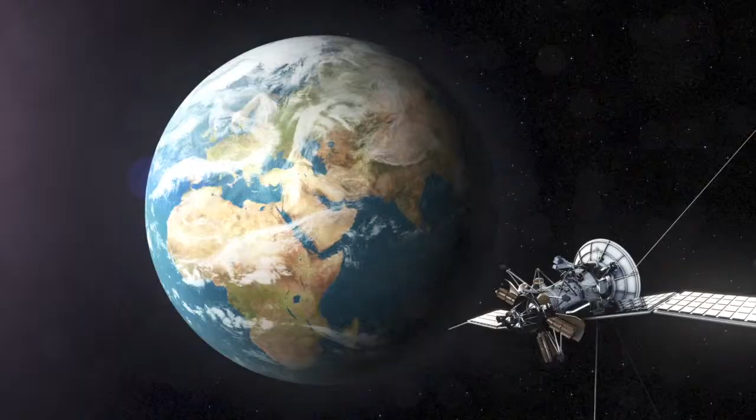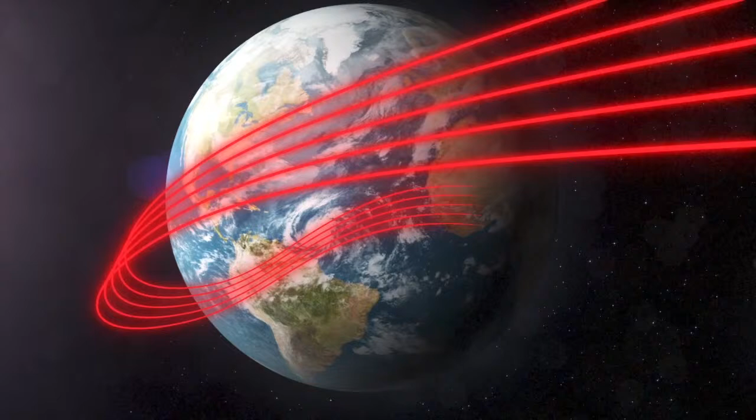Our globe is turning, steady. Electronics are part of our world, everywhere around us, always. Our world is spinning, fast. Technology is part of our lives. We make it work everywhere, right here, right now.

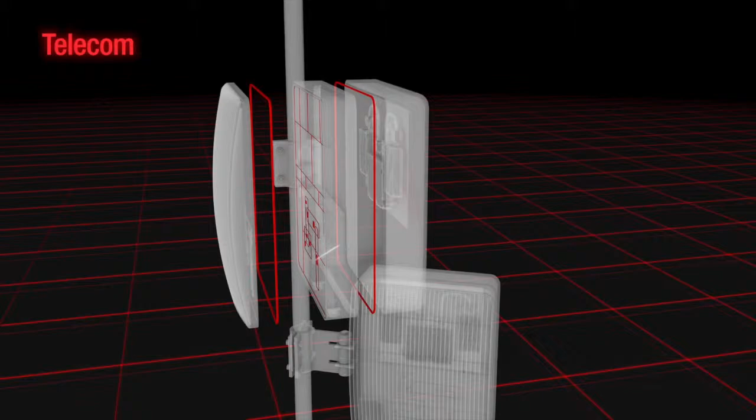The right solution can be the difference between success and failure. Functional EMC and thermal management solutions require knowledge, innovative design, and secured quality. A partner to trust. In order to challenge expertise, reliability and effectiveness are necessary. We know how and why.

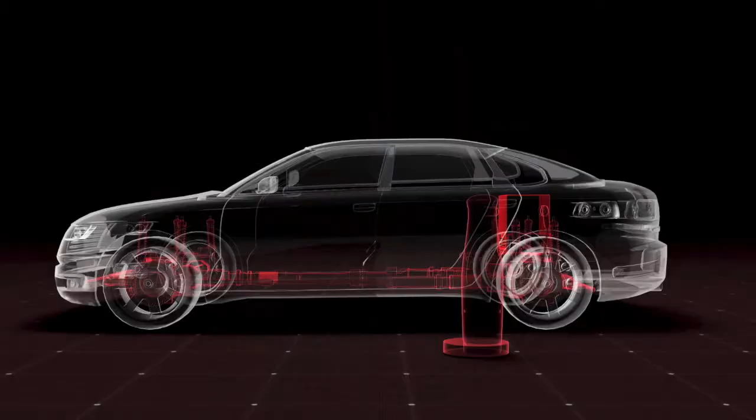Nolato offers you the optimal solution, whatever product, whatever industry. We know what and when. We provide you advanced development in order to keep you one step ahead on the market.

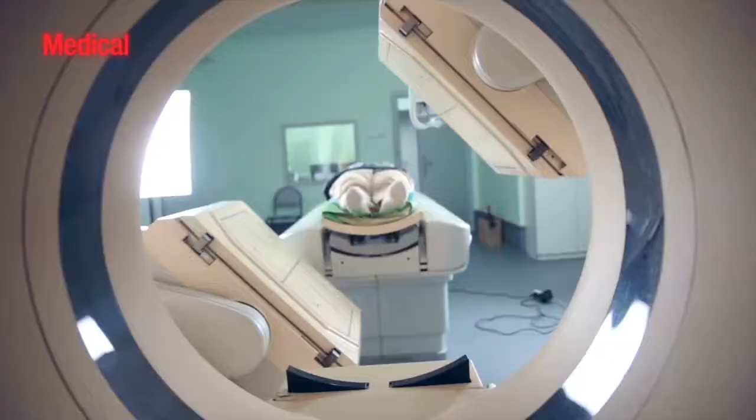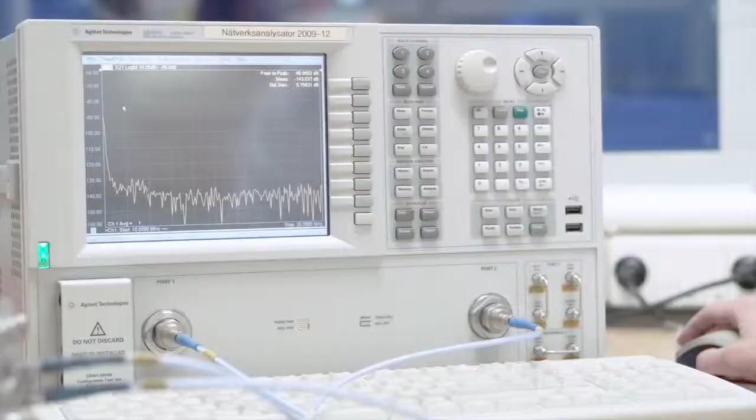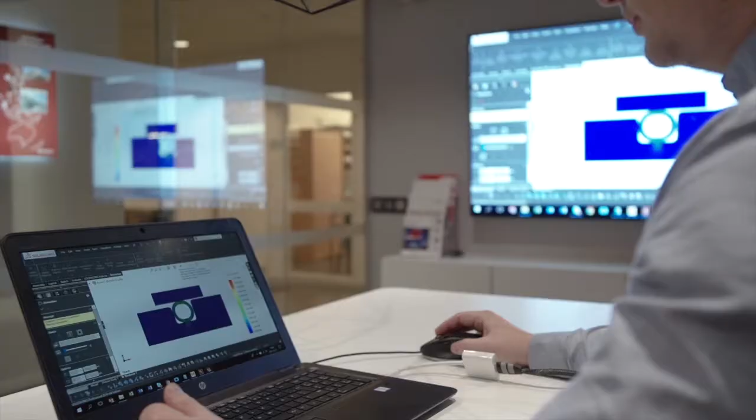With high quality and unique material, our expertise is yours, when you need it, where you need it. Nolato gives you innovation, efficiency and future. Customized or standard, wherever you are, whatever you do, we are there for you all the way, always near. So let us show you how we change the world and your business. Sustainable, unique and professional, today and tomorrow. The future is here. We are your world partner in EMC and thermal management.

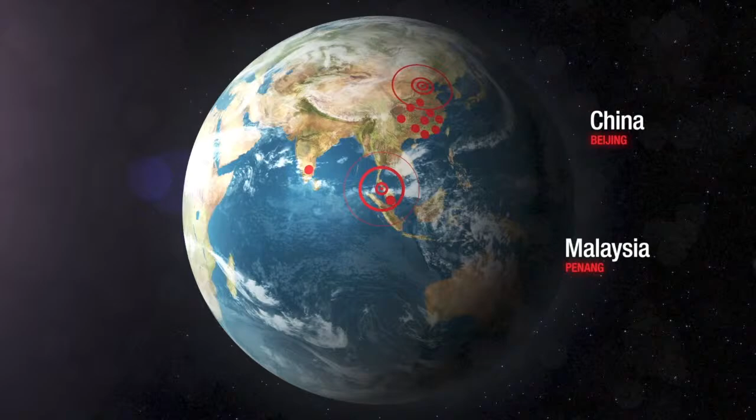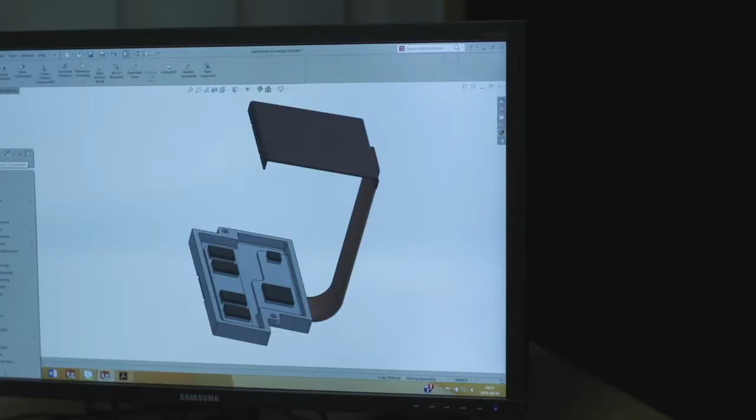Far beyond only recommending which type of interface material to use, we have the expertise to guide you in your whole thermal design process. Our expertise also covers the other technologies for electronics thermal management on the market and how these can be applied to best effect. The thermal design influences many other hardware and even software disciplines in application design, all of which we have familiarity with.

Our organization possesses an extensive experience of designing thermal solutions for all subsets of the electronics industry, from advanced high-tech to extreme high-volume consumer products. Our capable R&D organization is constantly advancing our position in electronics thermal management. They can also develop new custom materials to customer requirements.

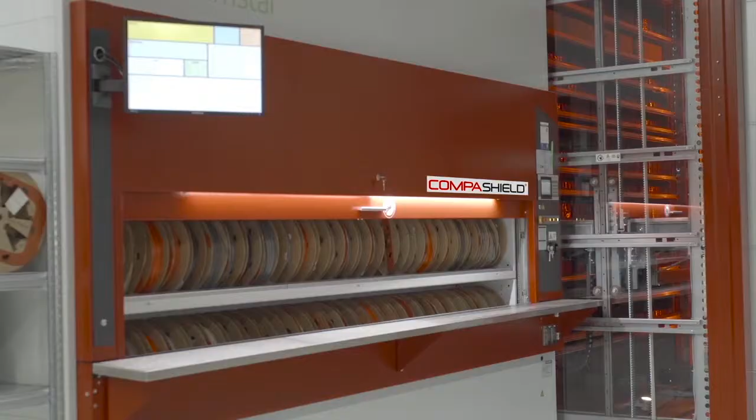CompaShield extruded gaskets are made of electrically conductive silicone rubber, designed to fit the specific application perfectly. The gaskets are available in any profile and cross-section needed by the customer. Our extruded solutions are cost-efficient and reliable. No wonder CompaShield extrusion has become widely used in all kinds of application areas.

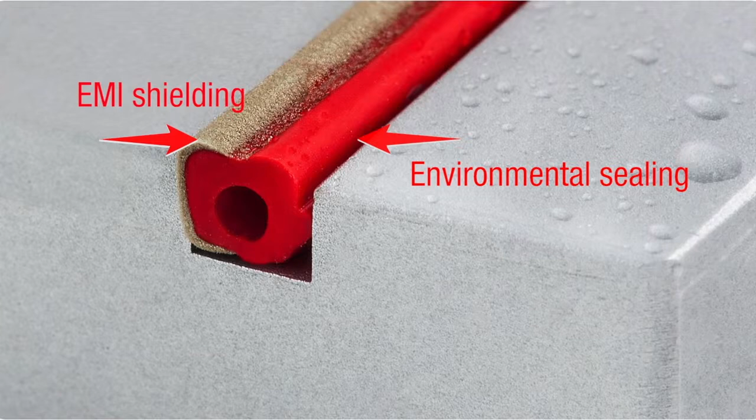Besides the wide range of standard products, we also offer advanced solutions as the CompaShield EE gasket. An efficient solution that combines optimal EMI shielding and safe environmental sealing in one single gasket. Add the press fit feature to the EE gasket and you'll get assembly that is easier than ever. It also improves the shielding effectiveness and eliminates the adhesive costs.

With the anti-stretch feature, the gasket has an embedded metal thread reinforcement. This design prevents stretching and shrinking to enable an easier and more secured assembly, just the way you want it.

Another popular gasket is CompaShield Soft, co-extruded with conductive material as the outer layer and non-conductive as the inner. When soft becomes ultra-soft, with an even thinner conductive outside layer and a unique ultra-soft core, the gasket maintains its excellent shielding properties, but is also prevented from collapsing in sharp corners. CompaShield Ultra-Soft is ideal for connector applications.

Did you know that you can order free samples from our interactive gasket guide online? Quick and easy, and a great way to find your perfect match.

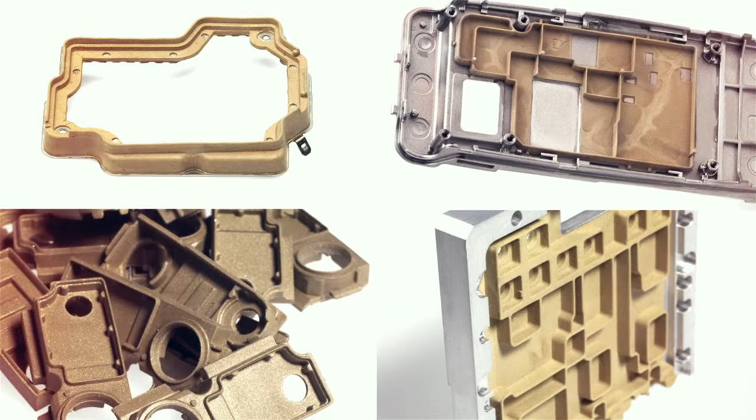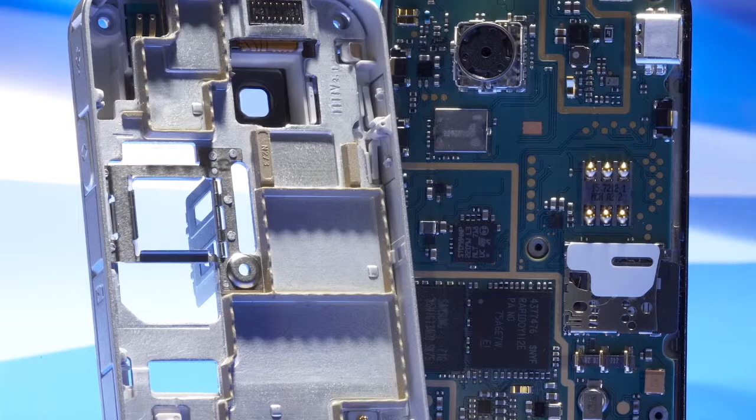CompaShield molding involves overmolding with electrically conductive silicone rubber on various substrate surfaces, for example cans and frames, or just as press-molded components. Our custom molded solutions with high-quality materials and efficient manufacturing methods are used for diverse applications in broad industrial segments. Besides excellent shielding, CompaShield molding provides great flexibility in design and gaskets with high-precision 3D geometry.

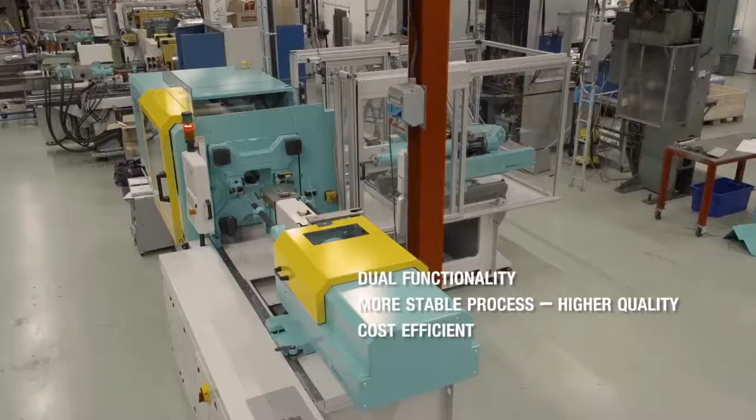Co-molding is an efficient alternative where both the conductive and the non-conductive silicone rubber are molded at the same time. This simplified process, with one step instead of the ordinary two, provides benefits such as cost efficiency and stability.

The CompoShield molding family also includes CompoShield sheets. The sheets are available in a range of conductive fillers and ready to order in standard size or as die-cut or kiss-cut parts, perfect for connector and waveguide gasket applications.

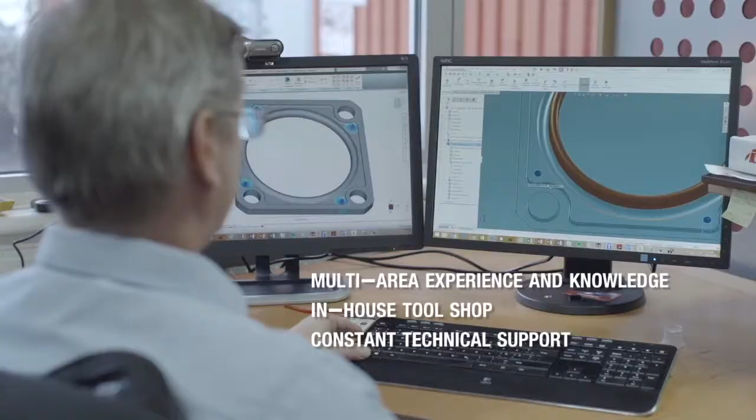Thanks to our experienced field application engineers, capable in both EMC and the mechanical area, you'll have constant support and guidance through the whole process, from conceptual phase to production startup.

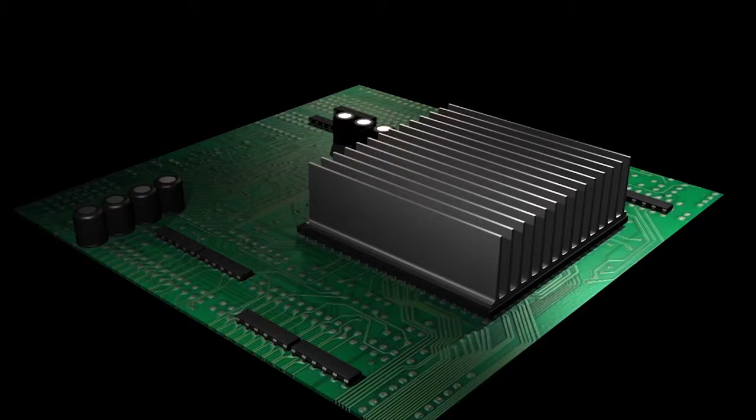Now, the crucial question is, where does this heat go? Heat dissipated at the rate it's generated won't accumulate as raised temperature and isn't a problem. However, with thermal barriers in the design, the temperature at the heat source will keep rising until the thermal gradient is steep enough for the heat to escape, which can cause problems, and this is where our expertise can help.

Understanding how to solve, or even better prevent, thermal issues in a design is never a question of one single component, of one single link in the thermal chain. It is a question of understanding the mechanisms of heat transfer, of following the heat all the way from the heat source to the final sink and removing the bottlenecks.

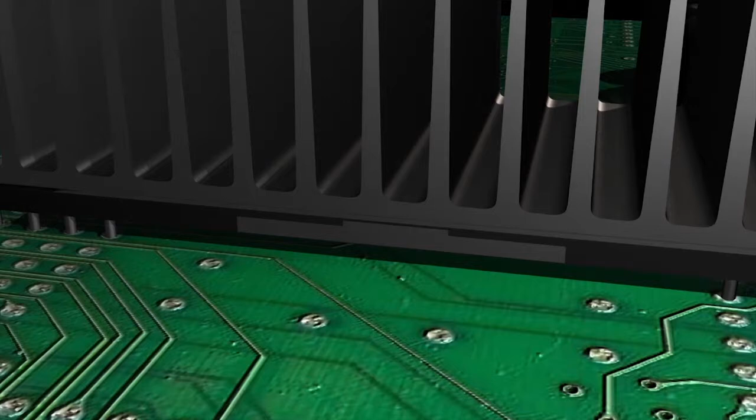We use thermal interface materials to facilitate the movement of heat from one solid body into another. Putting any two flat surfaces together will never yield even close to full contact. In reality, the direct solid-to-solid contact is something on the order of 2 to 4% of the total surface area. The remaining 90-something% will be pockets of air. Air is a brilliant thermal insulator, and in a thermal interface, we don't want that.

And that's what TIMs do. They displace the air and replace it with a material with at least 2 orders of magnitude better thermal conductivity. It's all about removing the bottlenecks.

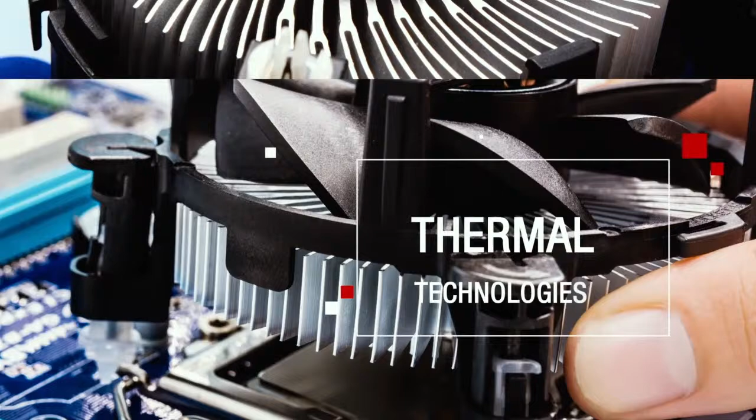Although we specialize in one particular thermal management technology, interface materials, we understand the other technologies involved and how these relate to one another. Therefore, we can assist our customers in their thermal design and guide them to a solution.

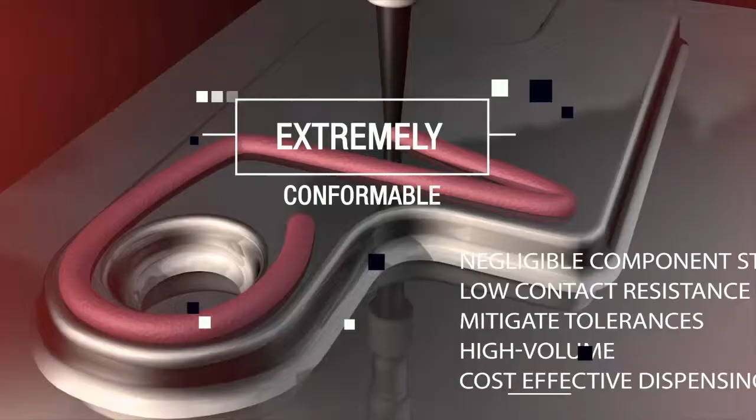CompoTherm fillers are liquid dispensed thermal filler materials that are able to conform to any arbitrary geometry and provide effectively negligible component strain, while also being highly adaptive to high volume production.

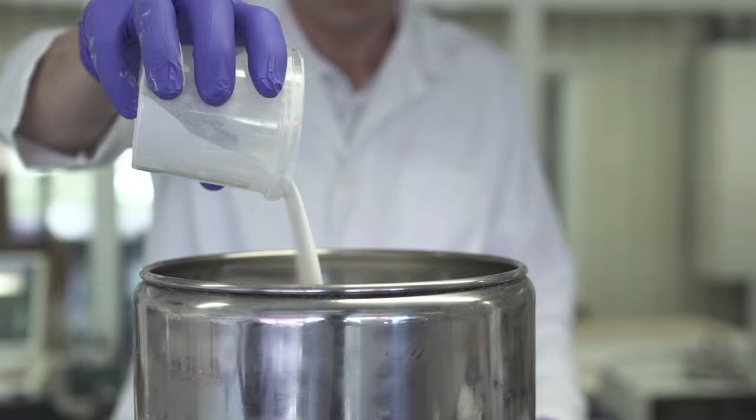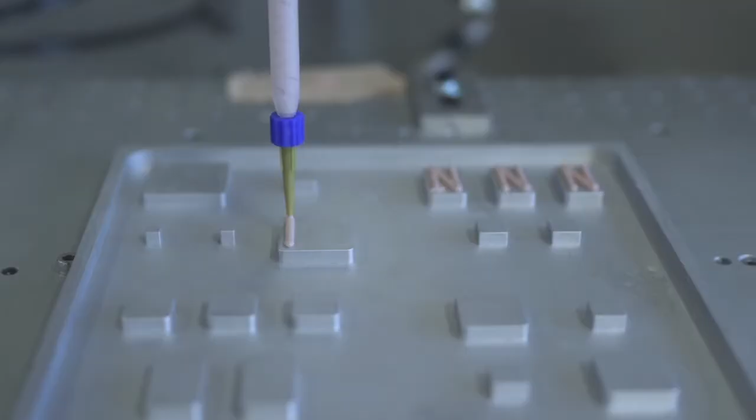We also have the capability to customize our filler materials by optimizing, for instance, curing times or viscosities to specific customer requirements. For our two-part materials, Nolato has also developed a machine material integrated solution to enable a highly cost-efficient dispensing process.

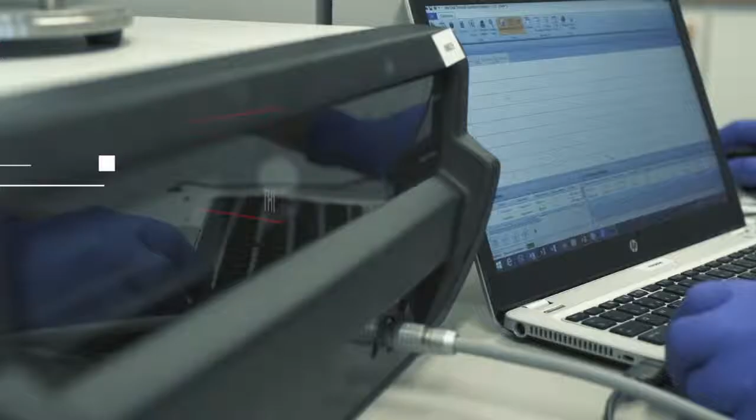Nolato Silikonteknik uses the ISO standard hot disk measurement to measure thermal conductivity, because this offers a number of significant advantages over the widespread variations of the ASTM D5470 method.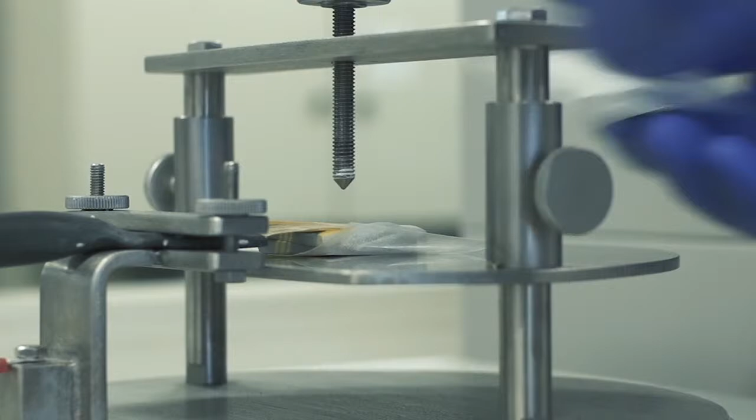The hot disk method uses a thin disc-shaped probe placed in the center of a small sample of material. A current is run through the probe, causing it to heat up. The same probe then monitors the temperature versus time response of the sample with a very high degree of accuracy.

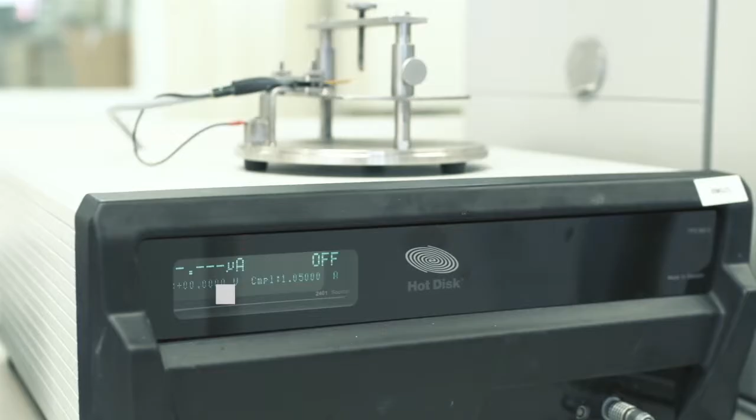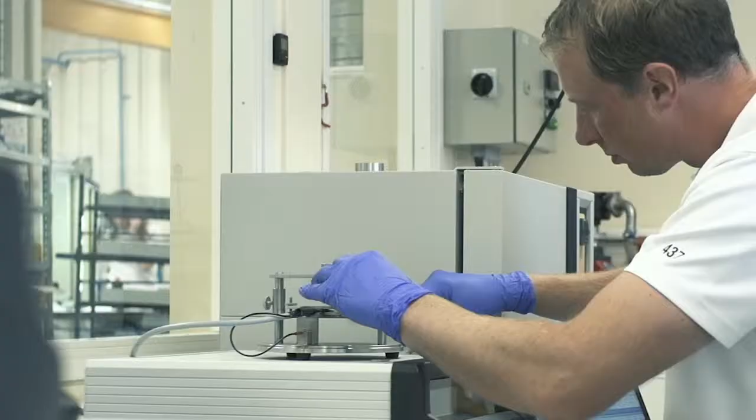Unlike ASTM D5470, the hot disk method is entirely self-contained, in that neither the sample itself nor the test equipment is subject to any other factors such as surface or positioning tolerances, radiative or conductive heat losses, etc., that may have a significant impact on the test result. This also means that the thermal conductivity numbers given by the hot disk method are generally much more conservative than those given by the ASTM D5470 variations.

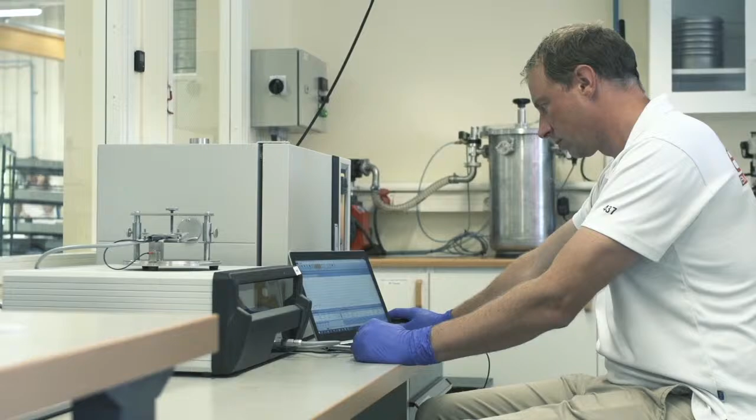Hot disk test results are also entirely reproducible, as the test method is fully standardized and not found in significantly different in-house variations and interpretations. As the hot disk method provides very accurate data rapidly, we are also able to use the same equipment in our inline QA testing as we use to make our data sheets.

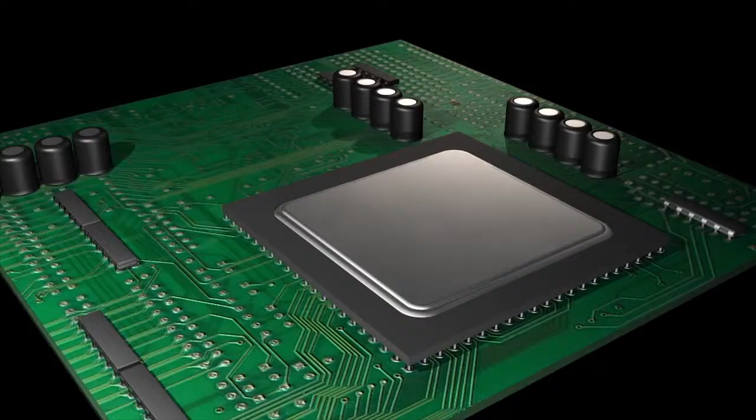Compotherm pads are conformable, thermally conductive silicone pads for applications where heat must be conducted between a component and a heat-dissipating surface without stressing the component, or where gaps need to be bridged. Our materials come in a range of thermal conductivities.

Compotherm pads have a natural double-sided tackiness, but with our proprietary technology, we offer the option to remove the tackiness on either side with only a minimal impact on the thermal performance. We can also offer pads with a variety of other customizations, including a choice of reinforcement liner materials such as fiberglass mesh or aluminium foil to answer a breadth of customer requirements.